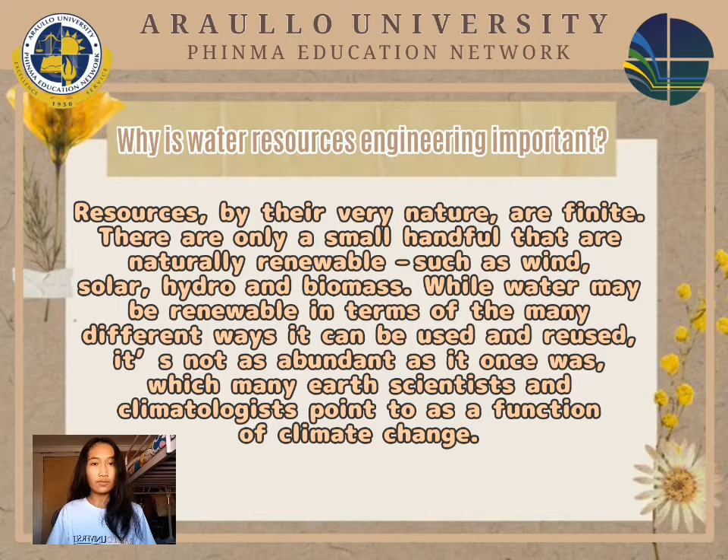This figure is a representation from the Bureau of Reclamation of the world's water supplies. It provides perspective as to just how limited this resource is in terms of usability, despite its vastness. If the world's water supply were roughly 26 gallons, the amount of fresh water available for safe usage would be the equivalent of 0.003 liters — that's equal to roughly a half teaspoon.

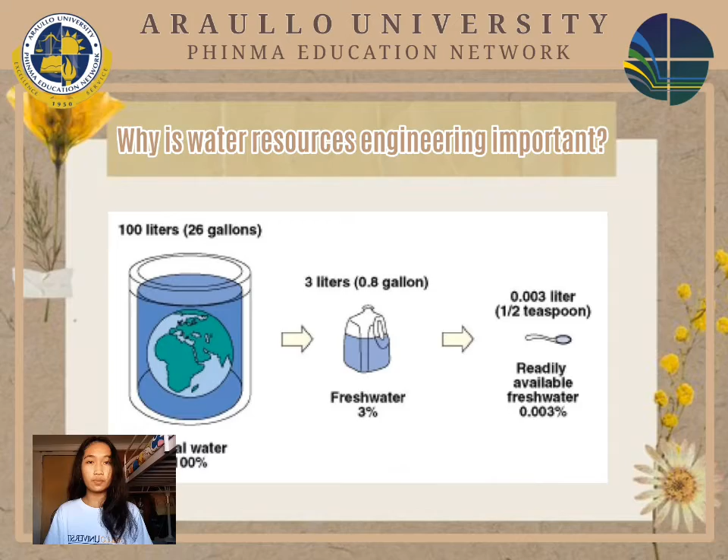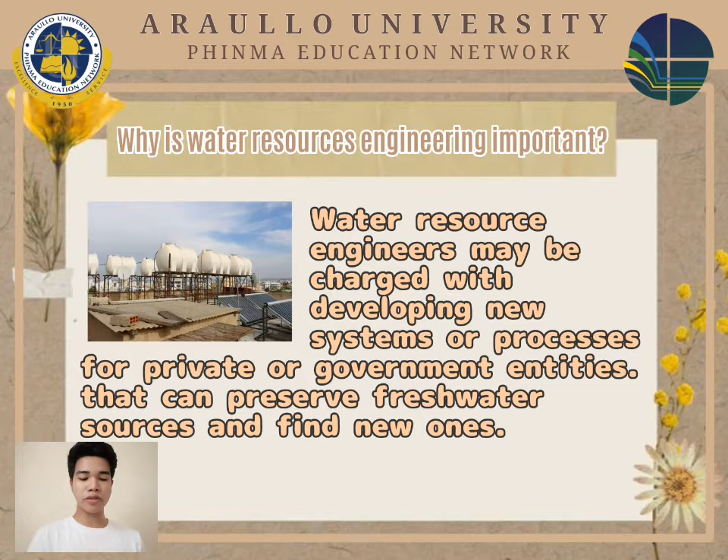Why is water resource engineering important? Water resource engineers may be charged with developing new systems or processes for private or government entities that can preserve freshwater sources and find new ones. This may require the assistance of civil engineers as well, designing water purification methods, desalination, or creating new equipment for contaminant transport when water is used for irrigation purposes.

Understanding what works and what doesn't when it comes to water resource management is often a combined effort and may involve a number of different analyses, including hydrologic analysis, which is the study of the water cycle and the directions in which it flows, which may be influenced by weather and other environmental forces.

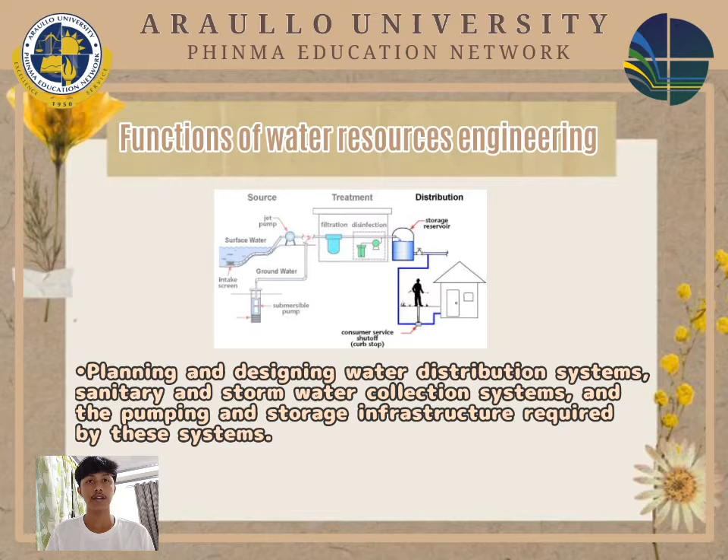Functions of water resources engineering: planning and designing water distribution systems, sanitary and stormwater collection systems, and the pumping and storage infrastructure required by these systems; designing highway drainage systems and conveyance structures such as culverts and bridges.

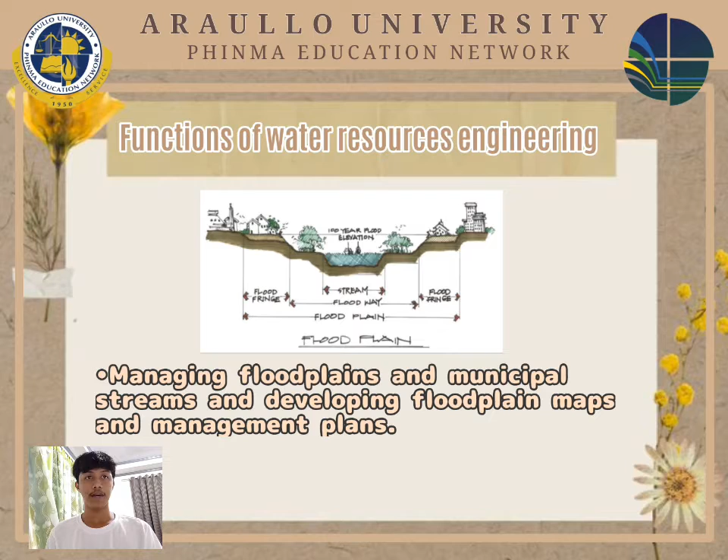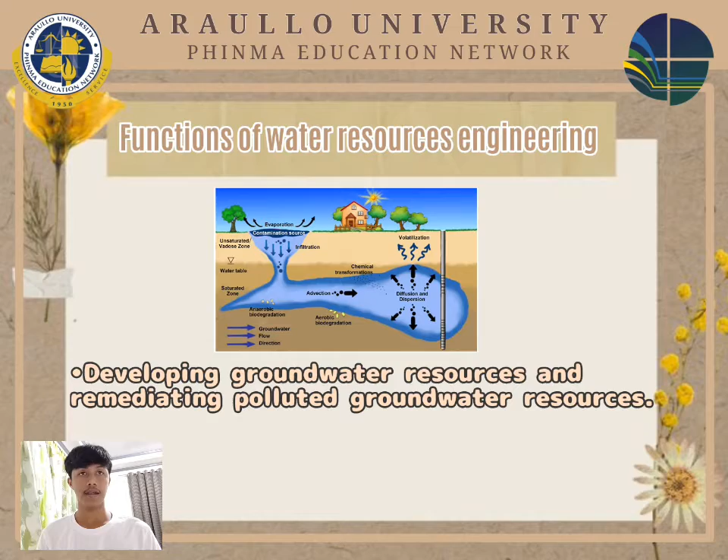Managing floodplains and municipal streams, and developing floodplain maps and management plans; managing rivers and reservoirs for recreation, flood control, irrigation, and other multi-use functions; developing groundwater resources and remediating polluted groundwater resources.

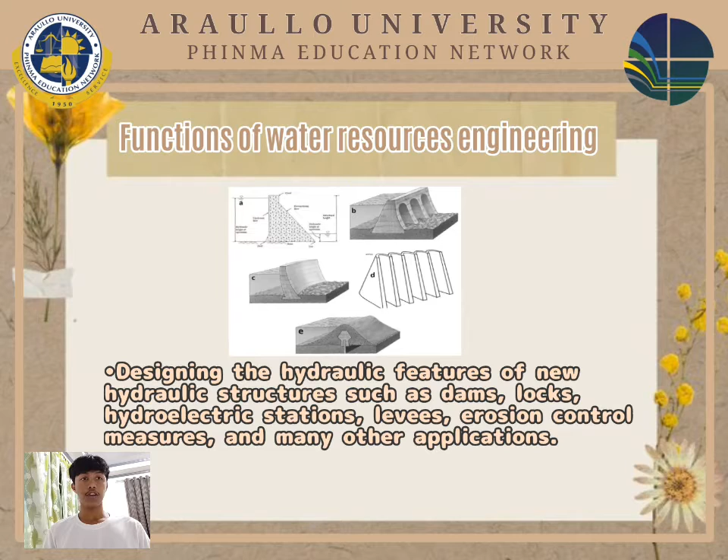Designing the hydraulic features of new hydraulic structures such as dams, locks, hydroelectric stations, levees, erosion control measures, and many other applications. Water resource engineering also deals with sewer systems for storms and wastewater, and irrigation networks.

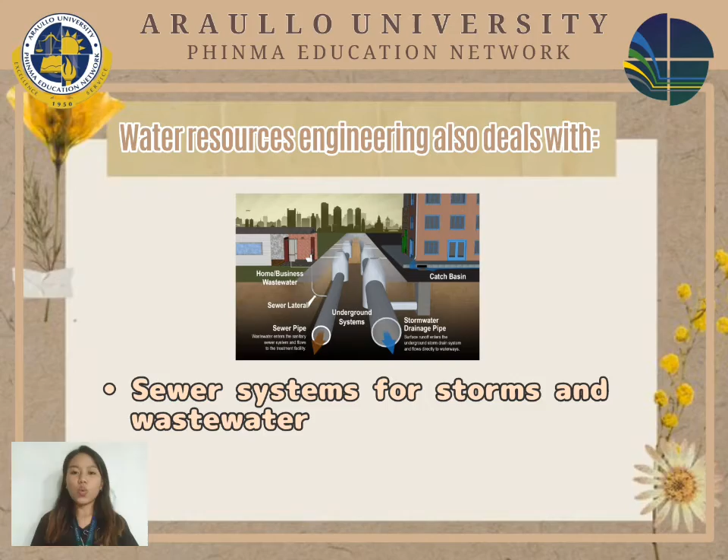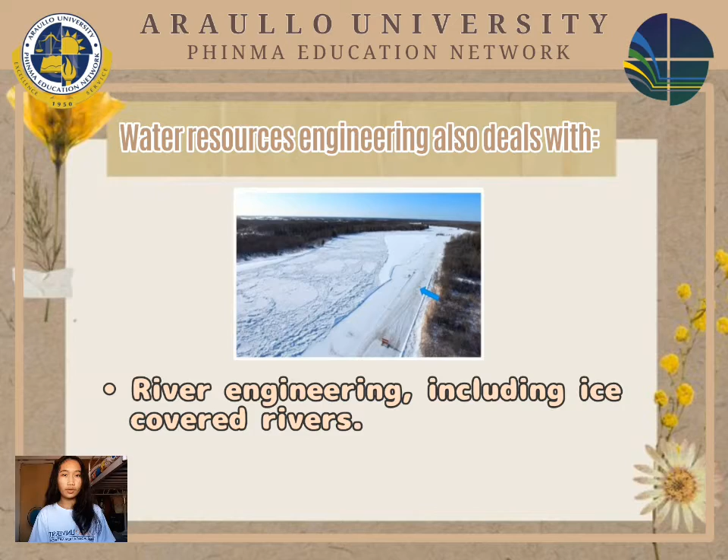River engineering, including ice-covered rivers. River engineering is a discipline of civil engineering which studies human intervention in the course, characteristics, or flow of a river with the intention of producing some defined benefit.

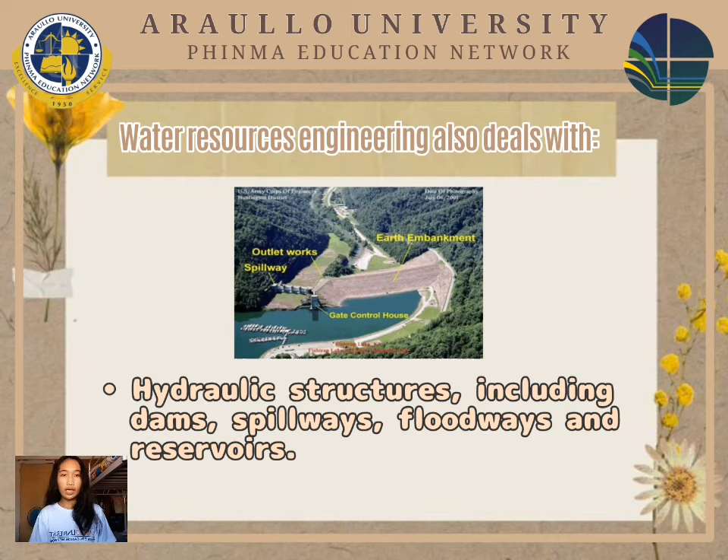Hydraulic structures, including dams, spillways, floodways, and reservoirs. This consists of the application of fluid mechanics to water flowing in an isolated environment or in an open channel. It's primarily concerned with open channel flow, which is governed by the interdependent interaction between the water and the channel.

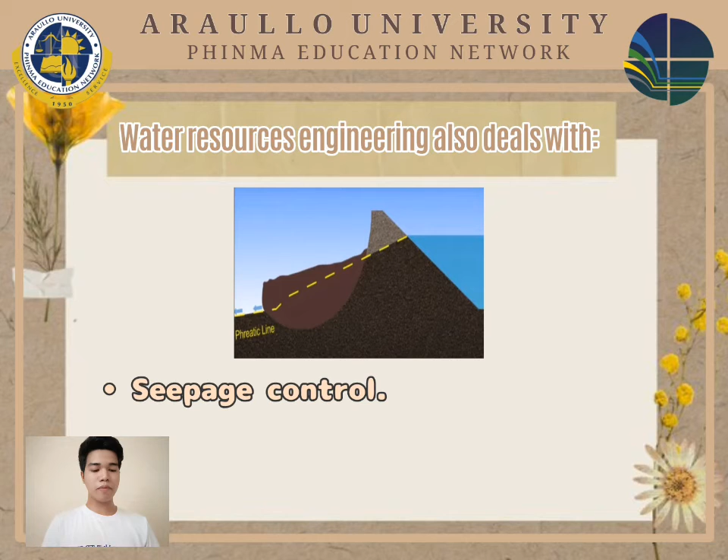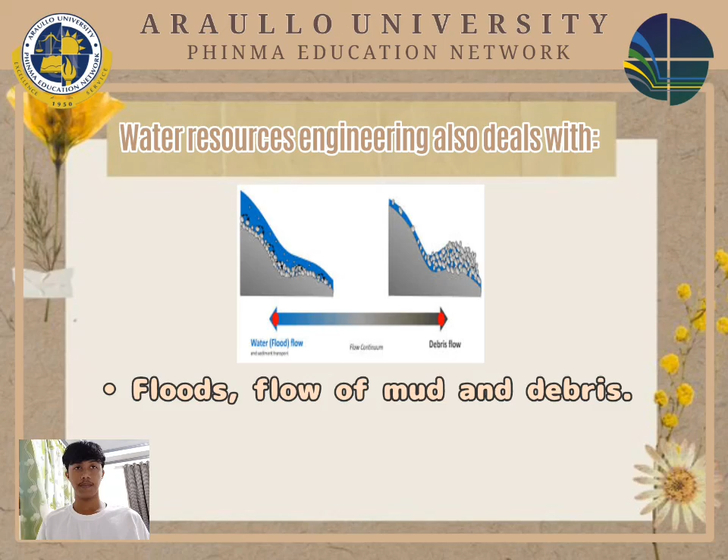Seepage control: the safety of an earth dam depends almost entirely on seepage control through the dam and its foundation. Hydrology: the study of the distribution and movement of water both on and below the earth's surface, as well as the impact of human activity on water availability and conditions. Floods, flow of mud and debris, and wave analysis.